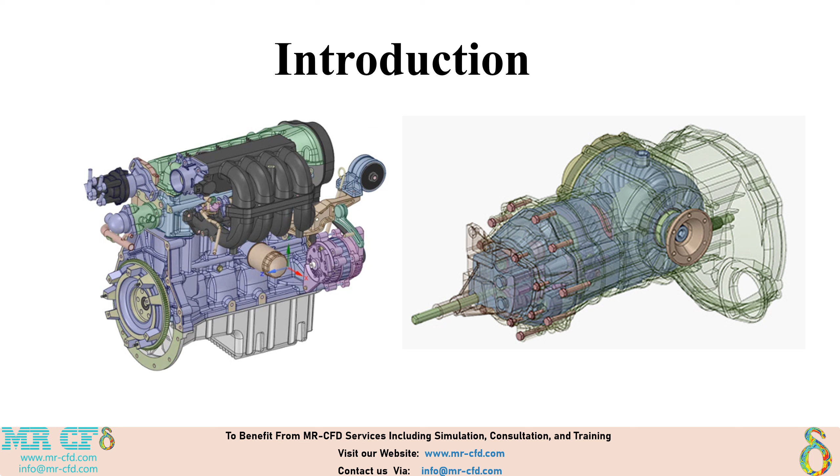Now that we've introduced the course, let's answer a very important question: why should we use SpaceClaim? The first reason is speed and simplicity. Traditional CAD tools can be quite complex, especially when you need to make changes to your model. You often have to go back through sketches, constraints, or parametric features. SpaceClaim, on the other hand, uses direct modeling, meaning you can simply push, pull, and move faces or edges of your geometry, almost like sculpting the model directly.

This makes the modeling process very fast and very intuitive. Second, SpaceClaim is perfect for engineers who don't want to get lost in the small details of CAD design. If your main goal is simulation, analysis, or rapid prototyping, you probably don't need every single manufacturing feature in your model. SpaceClaim gives you exactly what you need: a clean, easy way to build and modify geometry without requiring advanced CAD expertise.

Third, SpaceClaim is widely used for common applications in engineering workflows: preparing geometry for meshing in ANSYS Mechanical or Fluent, removing unnecessary details like small fillets, holes, or complex features that only slow down your simulations, and of course quick conceptual design, creating or modifying 3D ideas in minutes so you can test them right away in your analysis. In short, SpaceClaim saves you time, reduces complexity, and keeps you focused on the actual engineering and simulation work, instead of spending hours adjusting CAD features.

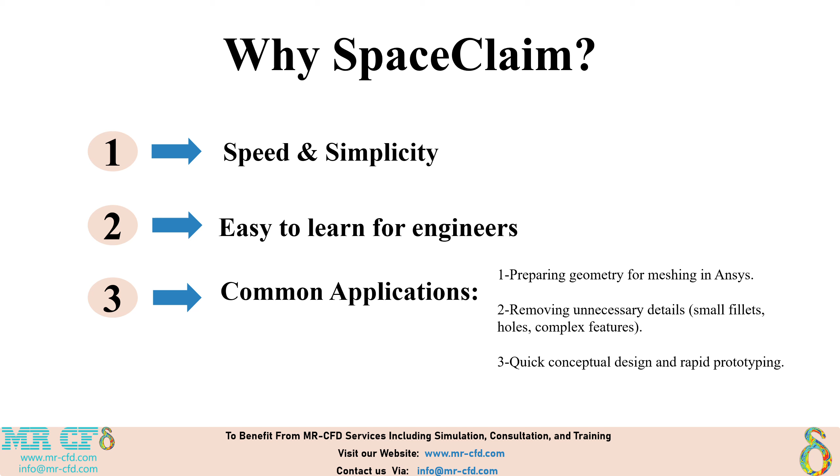In the next part, we'll take a quick look at the history of SpaceClaim, where it came from, and how it became part of the ANSYS ecosystem.

Let's take a quick look at the history of SpaceClaim, because understanding where this software came from helps us see why it's so unique. SpaceClaim was founded back in 2005 by a team of engineers who wanted to rethink how we interact with 3D geometry. At the time, most CAD tools were heavily parametric, meaning every design depended on a history tree of sketches, features, and constraints. While that was powerful for manufacturing, it also made modeling and especially editing very slow and complicated. If you wanted to make a small change, you often had to step back through the entire history of the model. The founders of SpaceClaim decided to focus on something different: direct modeling.

Instead of relying on a history tree, SpaceClaim lets you work directly on the geometry itself. You push, pull, move, and combine features in a very natural way. This approach made the software much faster, more flexible, and most importantly, accessible to engineers who don't necessarily have years of CAD training. Because of this fresh approach, SpaceClaim quickly gained attention in industries where engineers needed to modify existing CAD data or quickly prepare designs for analysis. It solved the problem of spending hours on CAD when your real goal was simulation or product testing.

Then in 2014, the company was acquired by ANSYS. That was a turning point, because ANSYS integrated SpaceClaim directly into its ecosystem of simulation tools. Today, when you open ANSYS Workbench or Mechanical, SpaceClaim is often the go-to environment for preparing and simplifying geometry before analysis. In other words, what started as an independent CAD tool has now become a core part of the engineering simulation workflow.

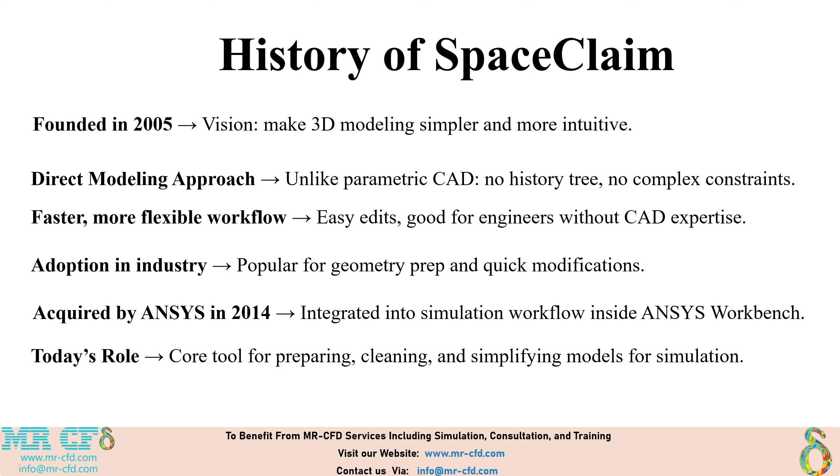Now that we understand the background and history of SpaceClaim, let's see how it fits today inside the ANSYS ecosystem and why it has become such a valuable bridge between CAD and simulation. Let's compare SpaceClaim with other CAD and CAE tools, because this really highlights what makes it different.

Traditional CAD software, like SolidWorks, CATIA, or Creo, is parametric and feature-based. Each part of your design is built step by step. You start with sketches, add features, and everything is stored in a history tree. This gives extremely precise control over every detail, perfect for manufacturing or detailed production drawings. But every change depends on the history. If you want to change the size of a hole or move a surface, you often need to go back to the original sketch, modify constraints, and rebuild the entire model. That can take time and sometimes cause errors.

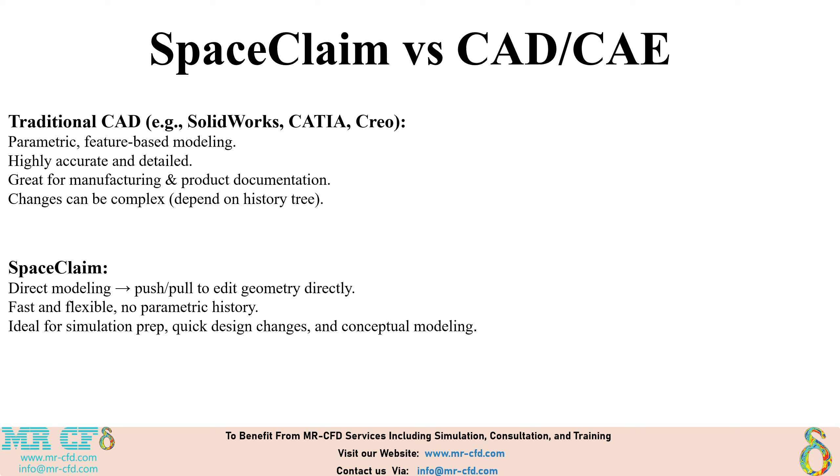Now let's look at SpaceClaim. Instead of parametric modeling, it uses direct modeling. That means you interact with the geometry itself. You can simply push, pull, move, or merge surfaces directly, like sculpting the model with your hands. There's no feature tree to worry about. This makes SpaceClaim much faster and more flexible, especially when preparing geometry for simulation, removing unnecessary details, or testing ideas quickly. Let me give you a simple example.

Imagine you have a block with a hole through it. In a parametric CAD system like SolidWorks, if you want to move that hole, you'd need to open the original sketch, change the dimensions or constraints, and then rebuild everything. In SpaceClaim, you just select the hole and drag it to the new location. That's it. Simple, direct, and instant.

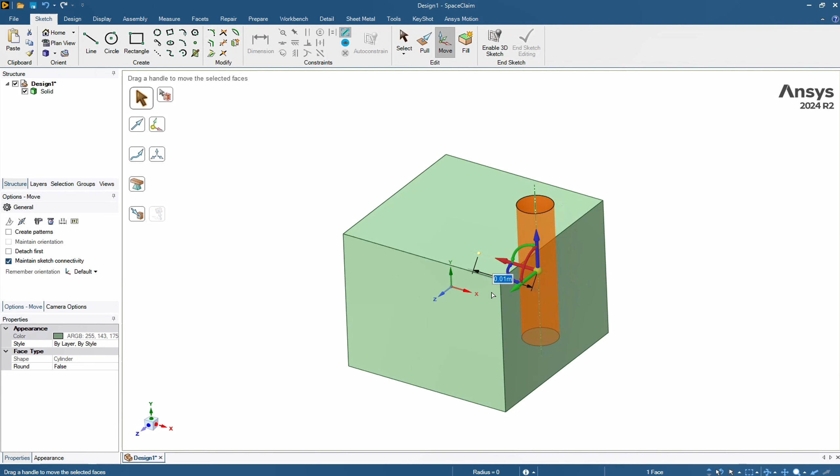This difference in workflow is really important. If your primary goal is creating highly detailed designs for manufacturing, a parametric CAD tool is usually the better choice. But if your focus is on simulation, prototyping, or quick geometry edits, then SpaceClaim is the faster and more practical option. It gives you freedom from the complexity of feature trees and lets you focus directly on your engineering task. So in summary, traditional CAD means precise, parametric, and manufacturing-oriented. SpaceClaim means direct, fast, and simulation-friendly. Both are powerful in their own domains, and together they can form a very complementary workflow.

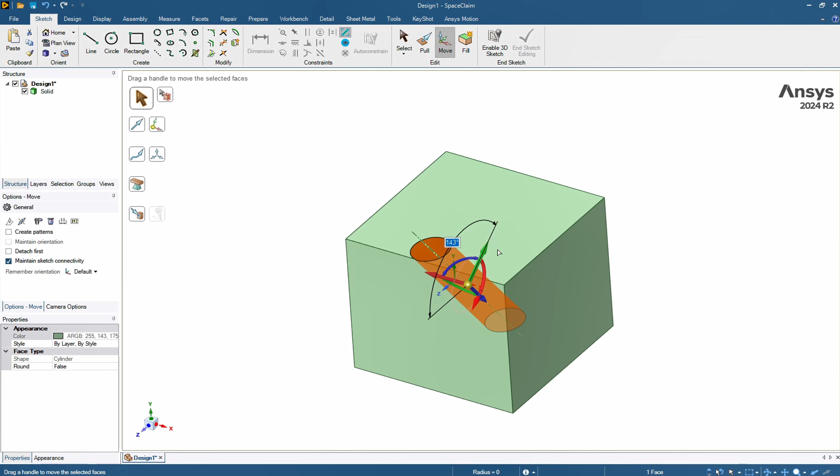The primary role of SpaceClaim in ANSYS is at the pre-processing stage. Before we can run a simulation, whether structural, thermal, or fluid, we need a clean and simplified geometry. Raw CAD models often contain unnecessary details like small fillets, tiny holes, or cosmetic features. These don't usually affect the physics of the problem, but they make the mesh much heavier. SpaceClaim allows us to quickly remove or simplify those features, making the geometry simulation ready.

Another advantage is that SpaceClaim is directly integrated with ANSYS tools. For example, it works seamlessly with ANSYS Mechanical for structural analyses and with ANSYS Fluent for fluid flow simulations. The handoff is smooth. You don't have to export complicated files or spend time fixing compatibility issues. You prepare the geometry in SpaceClaim and then send it straight into the solver environment.

The real value added here is efficiency. By using SpaceClaim, engineers can save a significant amount of time in the simulation process. Complex projects become more manageable, and the overall workflow is simplified. Instead of struggling with CAD constraints, you can focus on the actual analysis, which is what really matters.

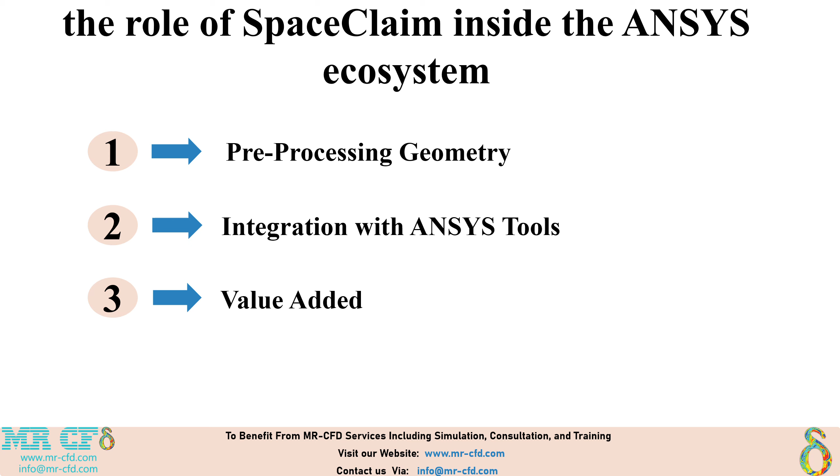So, in summary, SpaceClaim acts as the geometry preparation bridge in the ANSYS ecosystem. It cleans and simplifies the model, ensures smooth communication with Mechanical and Fluent, and ultimately helps engineers run faster and more reliable simulations. To wrap up today's session, our main goal was to introduce you to the essence of SpaceClaim, understanding what it is, why it was created, and how it fits into the ANSYS ecosystem. This background gives us the big picture.

Starting from the next sessions, we'll move fully into the software environment itself. Everything will be hands-on. We'll go step by step through the tools and commands you need to build and edit geometry, and we'll practice together on actual models. So today was the theory and history, and from the next lesson on, everything will be completely practical.

I hope this video was useful for you.